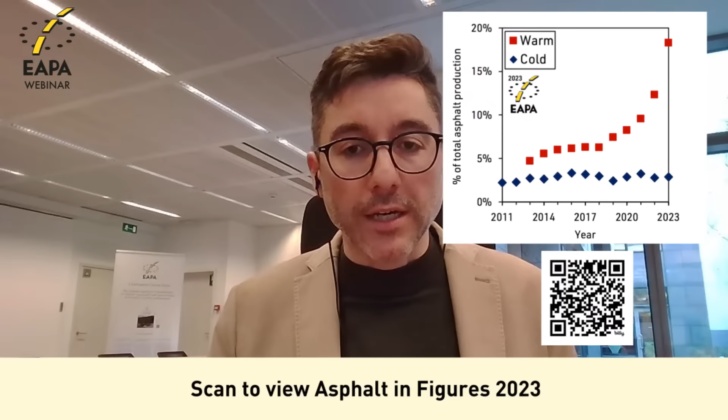Now the question is why. Why is warm mix asphalt so popular nowadays? Well, there are many reasons. The benefits or advantages that warm mix asphalt has were not so relevant in the scenario we had 20 or 25 years ago, but have suddenly become very important with the policies we have nowadays. For example, we have strict fumes exposure regulations in Germany, and the best way to meet the objectives is reducing temperature.

We have stack emissions regulations in the Netherlands, and the same. Reducing temperature is one of the best ways that we can do that. Green public procurement systems in Norway already for many years, where companies have to compete to be greener and greener, and burning less fuel. Reducing temperature is one very good way to do it.

Energy costs and fuel availability. We had some issues a couple of years ago that pushed the use of warm mix asphalt in some countries, for example in France, because it's a way to be more independent of what can happen with the fuels, so we need to burn less fuel. And this we can add to many other reasons, like lower handling temperature, which is safer, short-term aging so more durability, less thermal stress on equipment, and technology that is completely compatible with recycling and reuse of reclaimed asphalt, among others.

So now I repeat the question in the other way. If we have so many advantages, if the technology is not new and there is the will to use it, then the question is, why are we not doing it already? Why is Europe not already producing 100% of asphalt as warm mix asphalt?

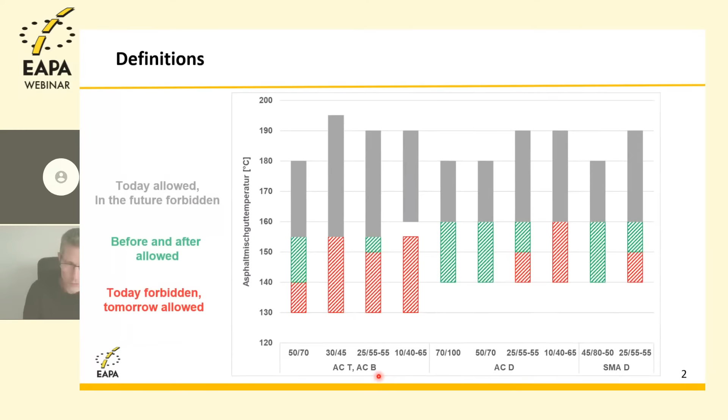First of all, what you see on the bottom is different types of mixtures. ACT and ACB are our base courses, so asphalt concrete as a base course, or asphalt concrete as a binder course—binder courses are our second layer in Germany, starting at the top. The next one, ACD, is the asphalt concrete for wearing courses. SMAD is our stone matrix asphalt, already used on the wearing course. On the line above that, you see the different types of binders: penetration grade binders like 50/70, 30/45, and also polymer modified binders wherever we use them—for example 25/55-55, normally only used for the binder courses, but anyway it is used.

So let's go to the graph. On the y-axis you see the temperatures of the asphalt. I hope you can still see that, but there were different colors in the graph: a gray color, which is the temperature range allowed today, and a green color, also used and allowed today. So gray and green is allowed today. Red is what will be allowed tomorrow, together with the green one. So it looks like—I'm back here—you see the gray ones plus the green one; this is what's allowed today. For example, the first one is 140 to 180.

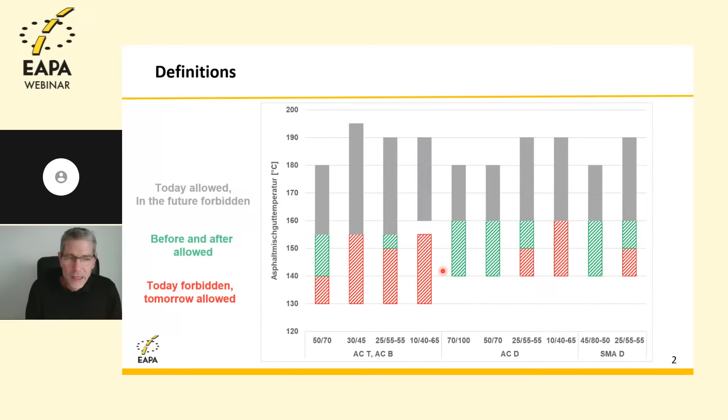Why are we doing that? Some people say, okay, we need that to reduce CO2. In fact, that wasn't the main driver for us. In Germany it was different, we had a special situation.

When we talk about hazardous substances, we have a designation being done by the European Parliament. It's categories which are defined according to the carcinogenity of a special substance, and bitumen was put from category 2 to category 3. In fact, it went better, but that made it necessary to define a maximum working place concentration.

So you were allowed to use it, but only up to a specific limit. In Germany, this process is started by the so-called MAK Commission, which is the Permanent Senate Commission for the Examination of Harmful Substances. They publish in German, in English, in Spanish, so everybody reads that, and they base their publication on scientific studies.

So what did they do? They looked at all the scientific studies and came up with a recommendation. This is only a recommendation, but they came up with a recommendation of 1.5 milligrams per cubic meter in an 8-hour shift. So it's a recommendation, not more, but also not less.

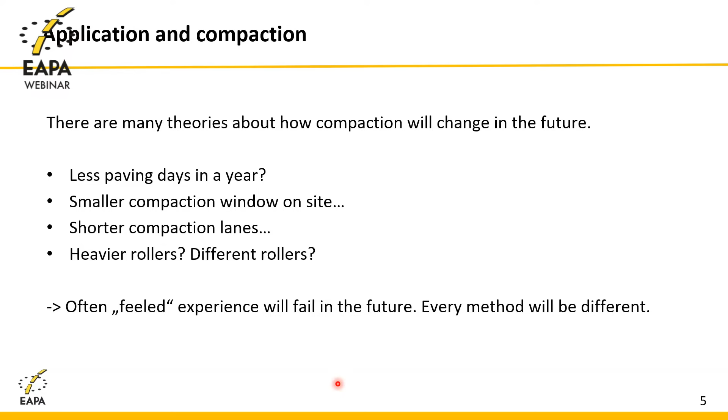So let's go to application and compaction. As I told you, we're still a little bit on the theoretical side. We haven't done too much. We did a lot of test tracks, of course, in Germany, but it's not like we produced 1 million tons of that, not yet. So we discussed that topic a lot, discussing what might change in the future.

The biggest concern for the moment is: will there be fewer paving days in a year? Will we have to stop paving earlier in the year? Nowadays we pave up to December if possible. Will that change in the future? Will we have to take care of the temperatures outside a little bit more than before?

On the other hand, will there be a smaller compaction window on site, which might result in having more rollers outside, maybe also different rollers? Does that make paving more expensive in the end because I need more equipment on site? Also, how should I use my rollers on site? What about shorter compaction lanes? Do I have to be closer to the paver?

Does that impact my safety concerns on site? So a lot of questions we're asking ourselves, and I can't yet give you the whole answer. I'm quite sure that it will also depend on the process we're using. Every process I showed you is different, so every process has to be dealt with in a different way.

We already have experience, for example, with surfactants. Surfactants do not change the rheology of the binder. So whenever the mixture was delivered to the site and it was 30 degrees colder than before, the people working on the paver who worked there for 20, 30 years said, oh, this is too cold. This is what they call dead hot mix. And so they started compacting like hell directly behind the paver, which ruined the evenness in the end.

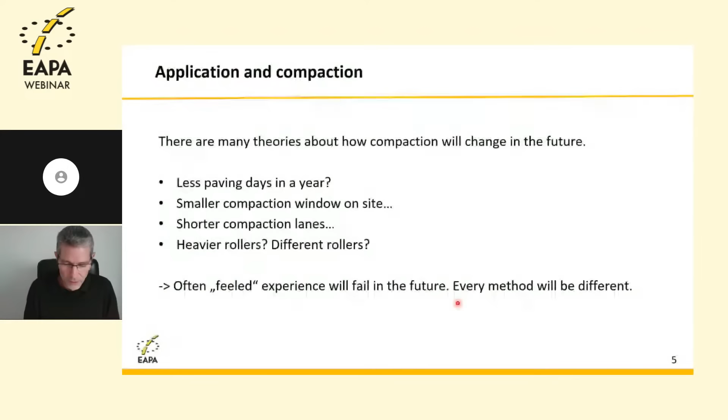Okay, so what else? Workability and compaction. Compactability is a different thing than workability, of course, and I think we will address the topic again in the next presentations. But for compactability, we are still testing with the Marshall device in Germany. So we have a kind of compaction device which is not really able to identify or simulate the effect of some of the methods in the laboratory.

So we actually have a problem simulating how much temperature do we gain, how much of the time window do we still have when we just do that in the laboratory. So we need to have more experience on site. We do not use the PCG, which might give you a deeper insight, and I hope that we will get new testing methods in the future.

This is one thing that really annoys me a lot. We're still using penetration, softening point, Marshall, which are all more than 100 years old. So we will have to definitely change the way of testing and simulating it.

Same for workability. For the moment, there's nothing, not even an old method for workability. So we are thinking about maybe using that NIAS device for looking at workability, trying to help the people who work by hand with the asphalt in the future. So this is still something we will have to figure out.

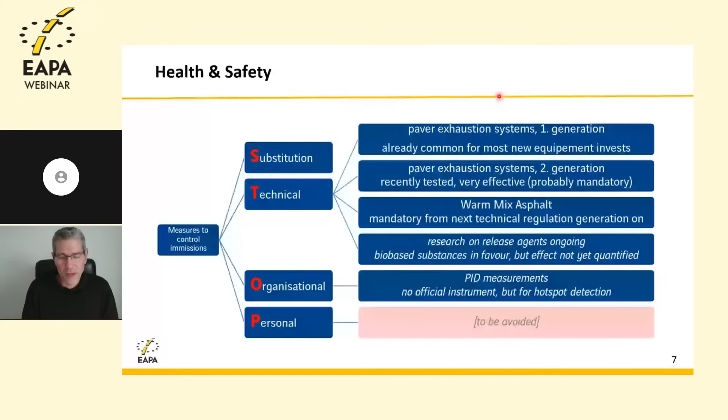Okay, just one look at health and safety. So health and safety actually is the driver in Germany, and you might have heard about this STOP mechanism. So we have to start with substitution whenever we have a problem. For the moment, we don't see one. Then we have the technical things, and this is what I wanted to show you.

So we're not only doing Warm Mix. Warm Mix is one of the technical things we're doing, but one of the other main issues for us is the paver exhaust systems, or ventilation systems, as they're sometimes called. We already have a second generation on the market thanks to the equipment producers. Only the combination of these two can help us reach this 1.5 milligrams per cubic meter. So it's not only Warm Mix Asphalt, we will also have to deal with equipment in the end.

I told you that we will have to implement Warm Mix in our regulations. That was one thing we promised the AGS. So we said, okay, we will definitely put that in our regulations. We have actually proceeded very far with our new regulations for production and for paving, and we're sure that we will get them out in the first quarter of next year. So from that day on, our regulations will be 100% Warm Mix. I'm still a little bit nervous about that big step, but I'm sure we'll get it done.

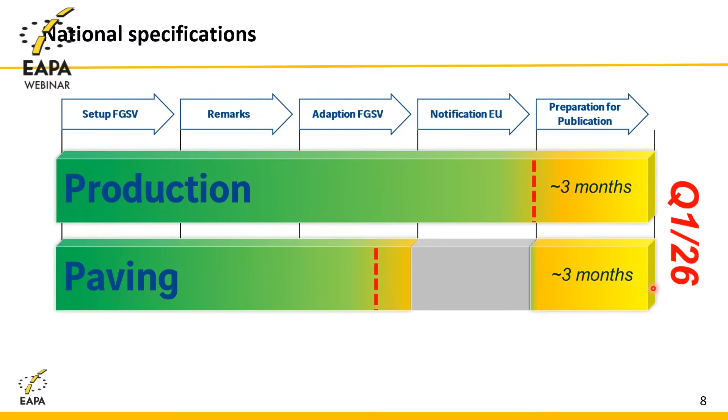So we have to have on site in the layer 98% of the compaction we got in the laboratory. I told you that with Marshall compaction, we're having trouble getting the same effect which we get outside. So some of the methods we use for Warm Mix will not be so dominant in the laboratory, so we might not see that effect there. At the same moment, we will get a problem outside when testing after we've paved, so there will probably be a lot of discussions. At least we will now have the void content, not only for the top layer but also for the other layers in Germany. That might help in the discussion, so that when we have trouble with the compaction degree, we can get back to the void content, because the void content really tells you the truth of what has happened.

Okay, so just some lessons learned in the end. Most people in the German asphalt industry are not only skeptical, they are really masters in ignoring something. So we went out and made roadshows with the German Asphalt Association. We addressed more than 900 people about the topic. We told them this will come, please prepare for it. I just did a seminar two weeks ago, and still people are asking me, are you sure this will come? And yes, it will come.

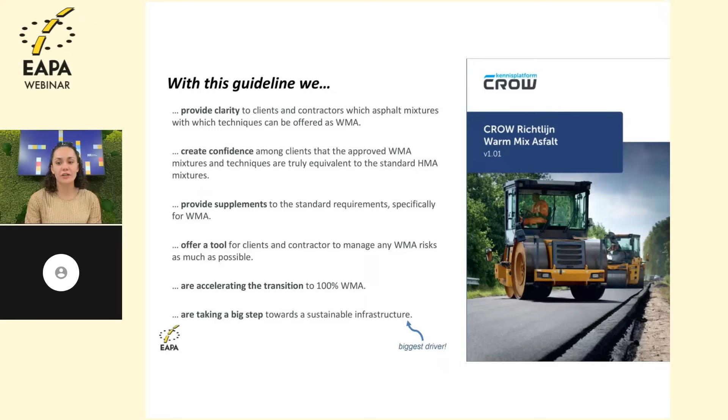And with the guideline, we provide supplements to the standard requirements specifically for Warm Mix Asphalt, whereby we offer it as a tool for clients and contractors to manage any Warm Mix Asphalt risks as much as possible, in the hope we can accelerate the transition to 100% Warm Mix Asphalt. Taking this step toward a sustainable infrastructure was the biggest driver to want to make this all a success.

So this guideline ended up as a physical bookwork with 3 chapters and several annexes. It explains in general what Warm Mix Asphalt is and frames the outline in which the document operates. But it also delves deeper into the technical aspects and provides recommendations for its application. Then we have some annexes that go deeper into various aspects of the general chapters, and 4 annexes that each address one specific technique in more detail.

And the best part, next to being a physical document, it is free to download online. The link is below, but it is in Dutch and non-searchable. But if you want to read it, it's free.

In the context of communication, it's important that we all share the same understanding. Therefore, the guideline also contains a list of definitions, in which the following definition is used for Warm Mix Asphalt: asphalt that is produced at a temperature between 100 and 140 degrees Celsius, with the note that that's the temperature at which the mixture leaves the tank. So it can be that some of the raw materials are preheated above or below this 140 degrees Celsius.

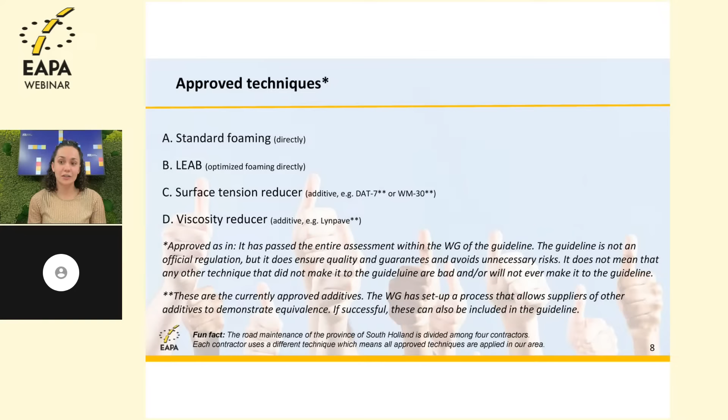To give you an idea of the spread of the different techniques, in our province road maintenance is divided among four contractors, and each could choose their preferred technique. Every contractor actually chose a different technique, so all four approved techniques are being applied in our area. I don't think that's a coincidence, but it says something about the popularity of the different techniques.

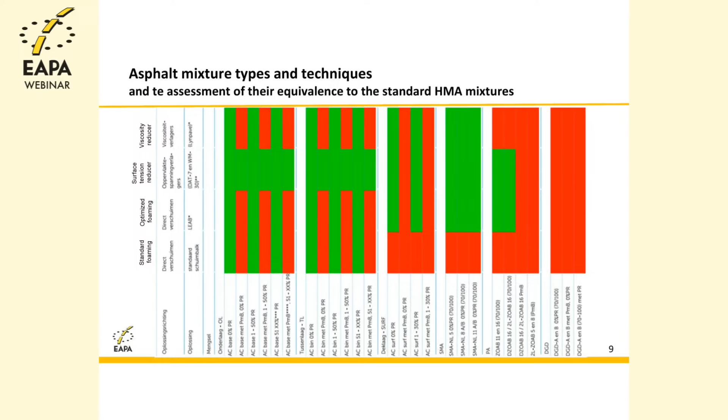During the assessment, we not only assessed the techniques in general, but also specifically per type of asphalt. We adopted our standard asphalt mixtures, which is asphalt concrete for surface, base, and bind layers, stone mastic asphalt, porous asphalt, and noise-reducing asphalt. Again, we assessed based on fundamental theoretical tests, functional research data, empirical evidence, and practical assessments, resulting in a matrix where green means it was found equivalent to hot mix asphalt, and if not, the box is red. With all this, we wanted to create confidence among clients that we are not taking this transition lightly, but that it consists of well-considered choices based on quite heavy assessments.

But as if that was not enough, we, the clients, wanted even more certainty - not this time about the quality of warm mix asphalt in general, but whether every asphalt plant could produce it and every contractor could apply it. So to increase client confidence, a separate program was set up in which every asphalt producer can demonstrate their ability to deliver high-quality warm mix asphalt, and the contractor can demonstrate their ability to apply it, whereby every test section is subject to independent and expert supervision, and all results are made public.

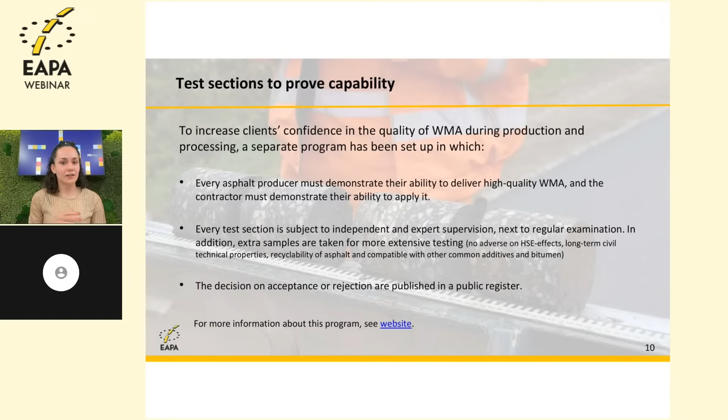Also, extra samples will be taken for extensive testing, for example to check that it has no adverse health, safety, and environmental effects, long-term empirical and functional properties, and the recyclability of the asphalt mixture, but also that it is compatible with other common additives and bitumen in case these come into contact during the application of reclaimed asphalt. If you want to read more about this program, you can click the link below - in this case it's a website, so I think it can be translated to English or any other language.

Like I mentioned before, we also examined the potential risks associated with warm mix asphalt. We quickly concluded that many of the risks are not exclusive to warm mix asphalt, but also applicable to hot mix asphalt. However, existing risks may occur more rapidly and intensify in the case of warm mix asphalt due to accumulation of multiple risk factors. Therefore, the guideline includes a comprehensive list of identified risks accompanied by corresponding measures designed to minimize and control the likelihood of their occurrence as much as possible.

This list of control measures is based on best practices at various phases, from design and planning up to processing the warm mix asphalt. This not only helps mitigate risks, but also takes away certain fears, mostly among clients, about warm mix asphalt. Some best practices per phase: in design and planning, you can minimize obstacles and manual work. It's good to take the season and weather into account when planning, and also bring contracts to the market in a timely manner, and therefore prepare them in a timely manner.

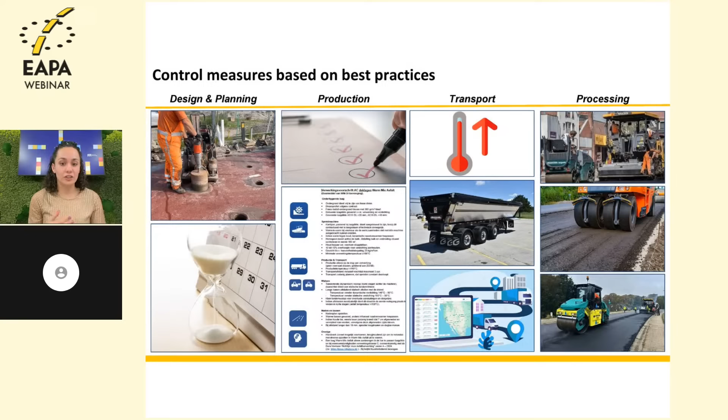But most important, I think, are the rollers. They need to be heavy enough to compact the right way, or you can maybe even think about adding an extra roller. Also, the rollers should be closer to the spreading machine, whereby they have to prioritize compaction of seams and joints.

And when hearing all this, you might think, sounds good, they'll manage just fine. Well, we hoped the same ourselves last year. We have a national agreement for the standardization of warm mix asphalt, supported by a widely endorsed guideline, which I just talked about. And again, there is a lot of experience among producers, contractors, and clients with warm mix asphalt. Why is it not yet 100%?

If you ask me, warm mix asphalt is not merely a technical change. It also requires adjustments on administrative, cultural, and economical levels. For example, some technical barriers are that not all asphalt plants are yet fully equipped for production on lower temperatures at this moment. But also the variability of mixtures is causing trouble.

The Dutch market has an absurd wide range of asphalt mixtures, whereby none of them behaves identically when produced as warm mix asphalt, which increases the need for type testing and validation.

If you look at the administrative and organizational barriers, many existing specifications and contracts still prescribe or refer to hot mix asphalt. Amending these requires procurement and adaptation, while no single national enforcement ensures that hot mix asphalt is banned at this moment, which means adoption of warm mix asphalt relies on a voluntary basis. With that, most local authorities are waiting for national obligation or sector-wide conviction before changing their policy.

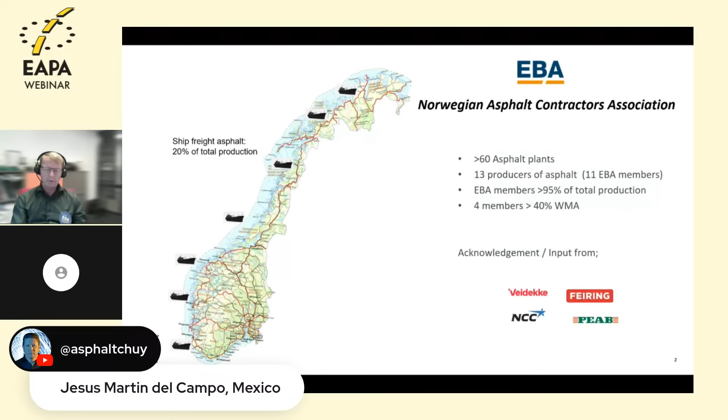I have to thank the other companies, members, Feiring and NCC and PEAB for input to this lesson learned, and this might be a little bit more, or just experience we have had now for the last 14 years on different plants, different mixes. It's not that problematic with Warm Mix, but we all have on each plant some various problem, or one problem that occurs on 3 plants or whatever. So first, the definitions.

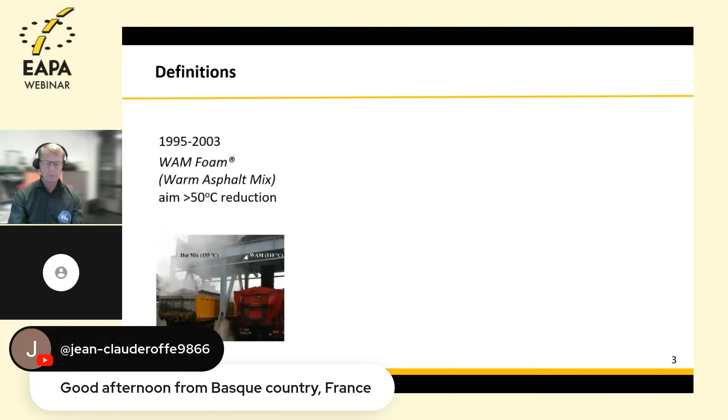We started in 1995 with this famous picture where the aim was to reduce the temperature by more than 50 degrees. We call it warm asphalt mix, WAM Foam, which was the first product, and we had 2 plants in Norway in 1995 producing this.

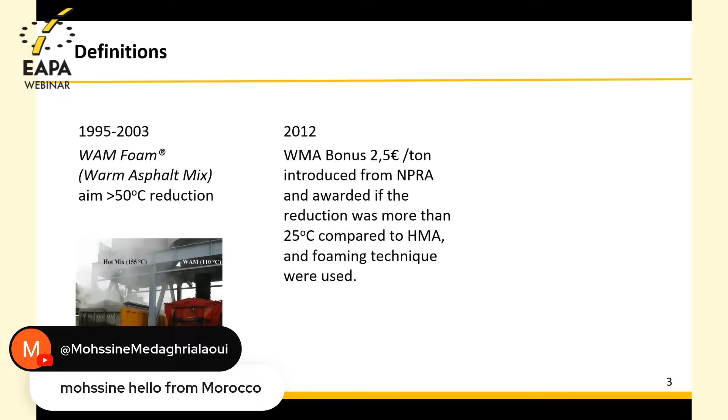Since 2012, EBA and the Road Administration and the government would like to push Warm Mix production. In this cooperation we had with the Road Administration, there was a situation with a bonus if we produced Warm Mix Asphalt in contracts. The requirement was that it had to be more than 25 degrees reduction, and based on some tests we did the year before, we had to use the foaming technique. So that was the first years, and then since 2019 we have used the EAPA definition that we have to reduce the temperature by more than 20 degrees.

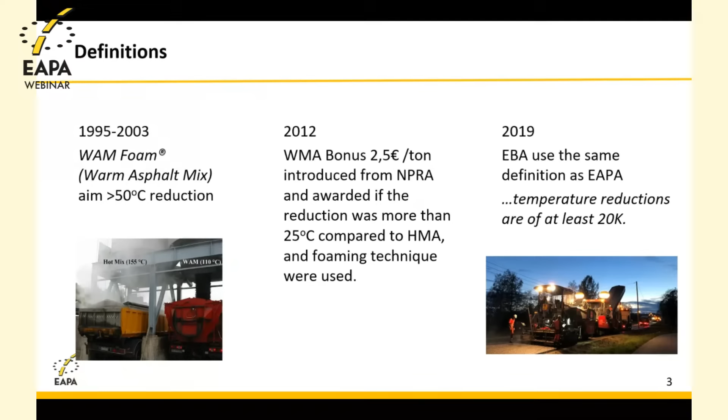Then we had also the discussion with the Labor Inspection Authority in Norway that they also want to push this, and they require that EBA report the percentage of Warm Mix Asphalt each year, and it had to increase. The aim we had back then was to reach 40% Warm Mix Asphalt just after 2020. Something happened in 21 with the pandemic and everything, and now it started increasing again.

And as mentioned, about 1 million tons was last year's volume of ship transport with warm mix asphalt or hot mix.

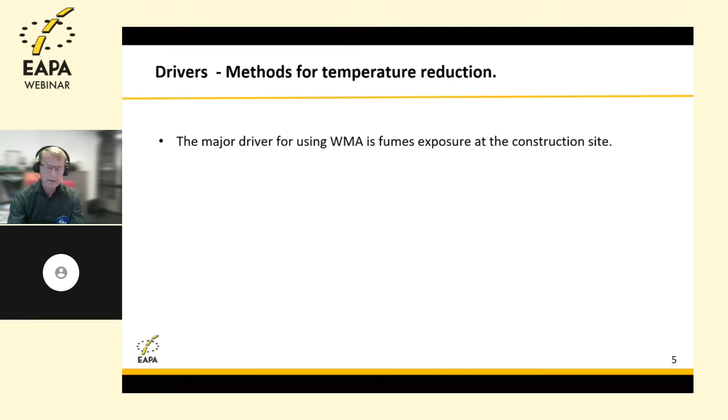Drivers, as you asked for, Breixo, it's mainly the fume exposure, and in EAPA on several committee meetings we have had this discussion about how to measure the fumes, which system or which requirement to use, and whether they are similar. But anyway, we have done a lot of tests in Norway with the Occupational Health Agency.

That started in 2011 when we tried. We had 11 different test tracks with foaming techniques and 5 different additives. Based on this test, a foaming system was introduced that would give us the bonus we have.

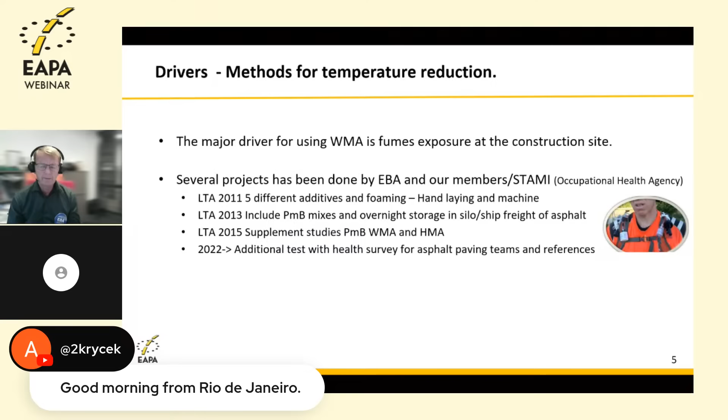Then we have had several tests on paving sites, both with ship freight, with PMB, with different types of PMB, inside tunnels, and in 2022 we also did a huge test for the health of the workers before season started and mid-season in July.

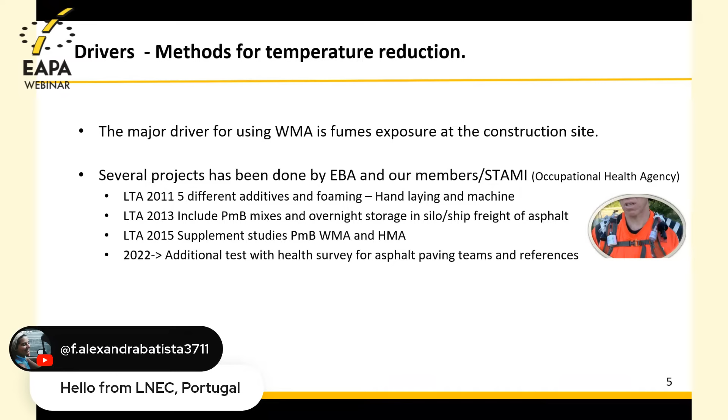Those results will be finalized, I think, early next year, we hope. It's a PhD study going on with all the results, so hopefully there will be some. So what we have done since the bonus system was introduced in 2012, nearly all the plants have a foaming system. That's the experience.

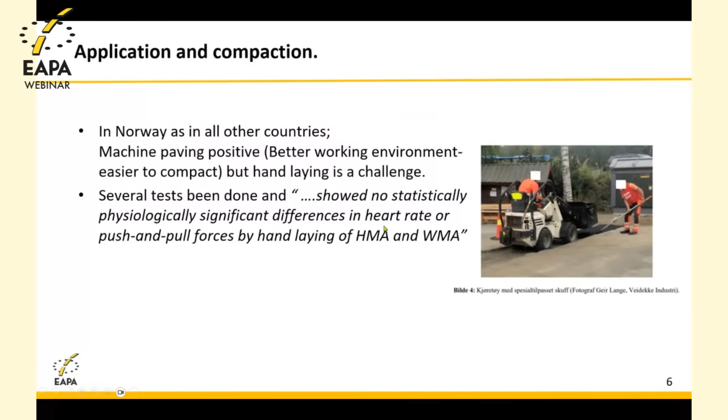As Tessa and Knut said, Warm Mix Asphalt works, but there's always a complaint when you have a handling issue. Some of these tests we have done show there is no significant difference between warm mix and hot mix asphalt, but that can change the attitude for a lot of people. So smaller contractors that just buy asphalt from a plant, they order really hot or sparkling asphalt, as I've heard from the UK.

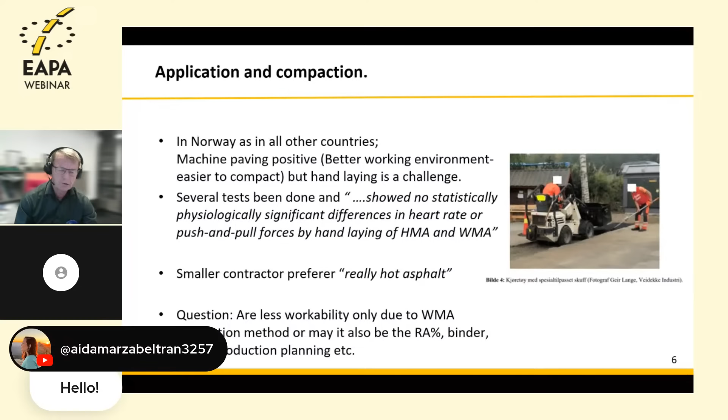And in all this discussion, it's always an argument why it doesn't work, but it can be a lot of things. So it's not one thing in each plant or maybe each country or whatever. It's the same with hot mix asphalt - you may have difficulties or some failure with something, and it's maybe not the hot mix asphalt itself, it's the production or all the other things in the paving line.

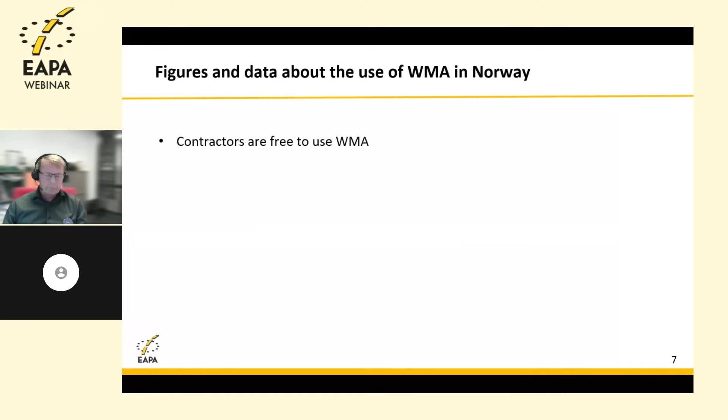Contractors in Norway are free to use warm mix asphalt. There's no limitation or anything in the guidelines. Some counties in the northern part have required 60 or 70% warm mix asphalt in their paving contracts in earlier years to increase the volume, and that's good.

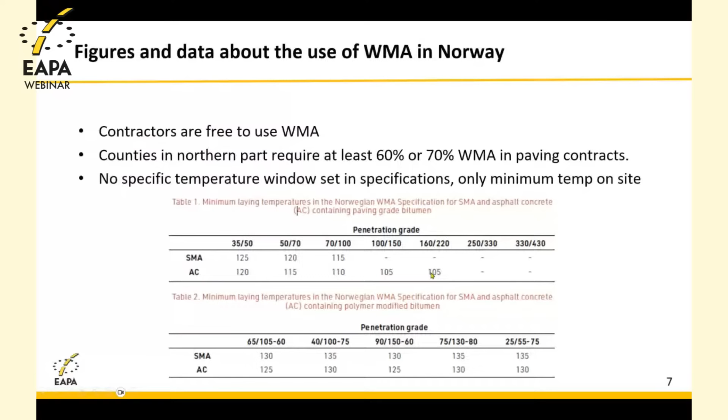Just one example to discuss the paving window and everything. What we see when we use infrared cameras behind the paver is it's easier to have a homogeneous temperature on the mix at the site with warm mix asphalt, and yes, you have a larger compaction window to achieve the right air void.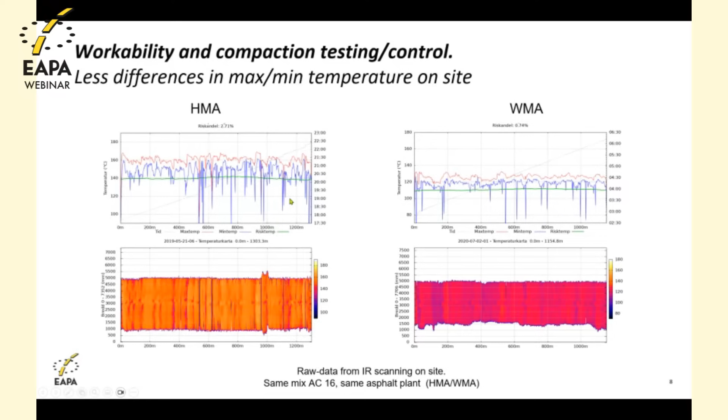All this up and down here is either a roller or a person going into the infrared scanning. This is from the same plant, same mix, but warm and hot mix asphalt.

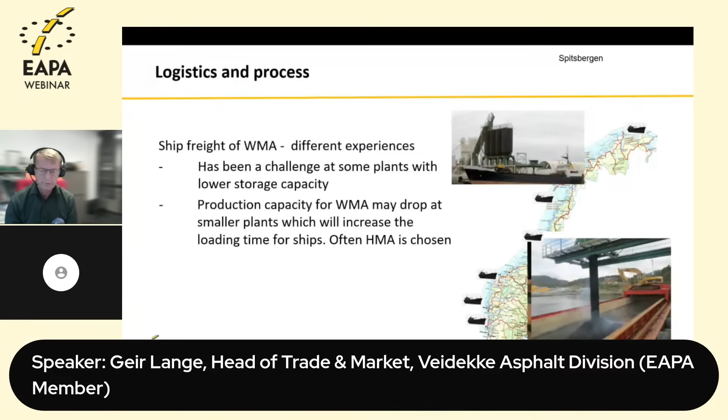Logistics, that's another thing. As I mentioned, all this ship freight with asphalt has had some problems at some asphalt plants. It depends on the storage capacity at the plant - if it takes a long time to load a ship with 1,000 tons or 1,300 tons or 800 tons, then something will happen to the mix. So that's not preferable. If you have the right silo capacity and loading system, then it works quite well.

And on smaller plants where you don't have a lot of loading systems, they often choose hot mix instead of warm mix. So that's one of the drawbacks with ship freight.

We also tried some years ago, in 2017 or 18, sending ships to Spitsbergen, a 48-hour sailing with warm mix asphalt, and it worked quite well when we paved it. The paving team really liked the warm mix asphalt when we sent it that distance. So I don't think you have to do that in the rest of Europe, but anyway.

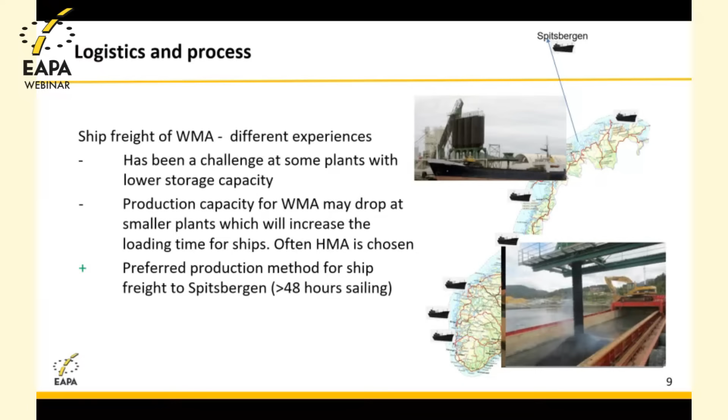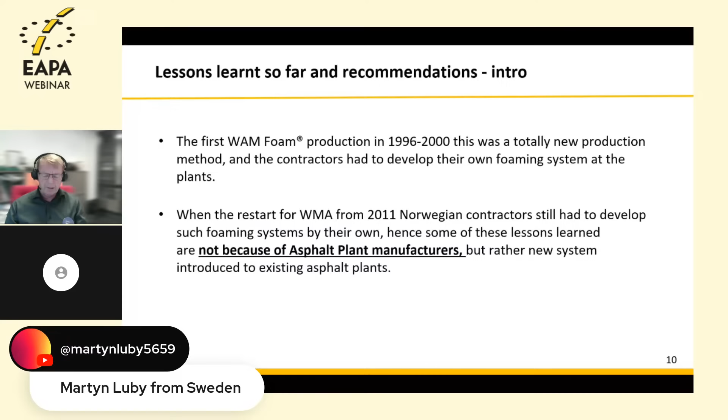And lesson learned, that's just a disclaimer. As I mentioned, we have a lot of foaming systems, and we had to construct our own foaming system in the plant when we started in 2011, 12, 13. So when I collected this experience or lesson learned, it's not due to the asphalt plant manufacturer. Bear with me, we produced or built this system on our own and introduced it to an existing plant.

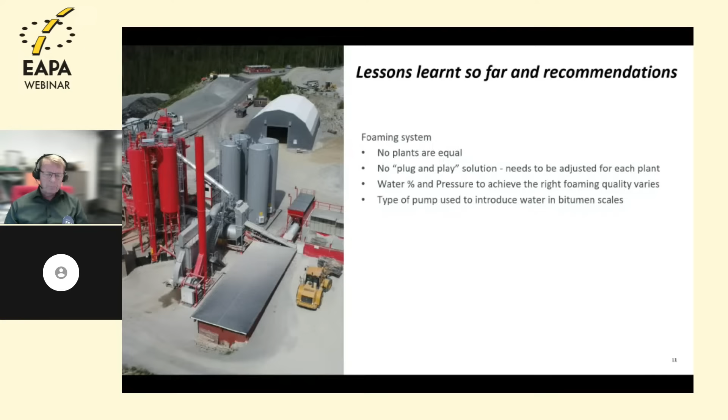So it's not a plant manufacturer thing, but experience we have achieved around Norway. With the foaming system, the major rule is that no plant is equal. There's no plug and play to get warm mix asphalt out. You need to adjust the plant, adjust the water percentage to get the right foaming, adjust the pressure, and you need certain types of pumps, as some other types don't work.

It's like you have to learn how your plant works with your mix, your reclaimed asphalt percentage, and everything else. When using the foaming system with water, you also need to check the quality of the foam. The left picture is a foaming sample that doesn't expand, it just bubbles in the bottom of the barrel, while this other one works quite well, showing expansion of the bitumen and foaming in the mixer.

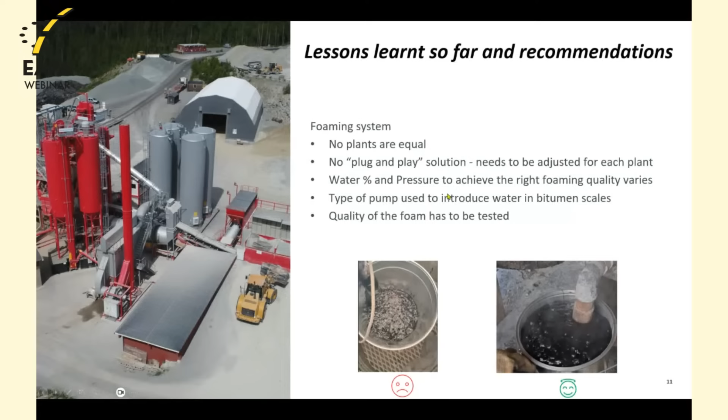So if you struggle with warm mix asphalt production with foaming, maybe the reason is because the foaming system doesn't work sufficiently, or the water percentage is too low, or whatever. You have to address each plant separately.

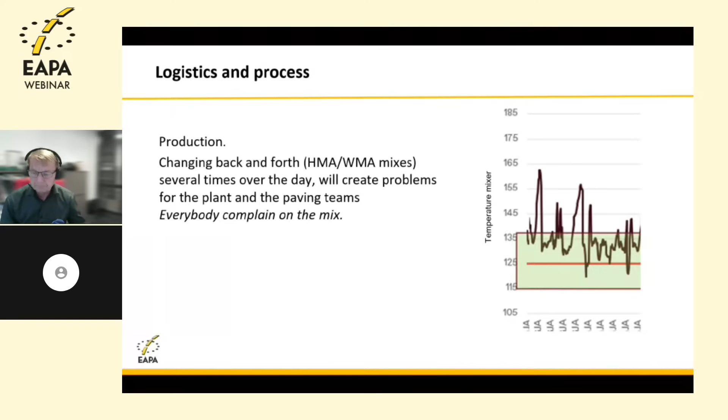The other thing that may cause problems is when you produce warm mix asphalt and the next customer wants hot mix asphalt in the plant, you get a very up and down temperature in the mix. This is an old picture of temperature at the mixer, but here I just took out the warm mix asphalt production during a day, and you see an increase in temperature due to a hot mix asphalt batch just prior to the warm mix asphalt recipe.

So why not 100% warm mix? Because then you have a more stable temperature in the plant. The other result is that everybody complains on the mix, both the hot mix and warm mix, when you have these changes. That's not rocket science, but it's a thing to remember.

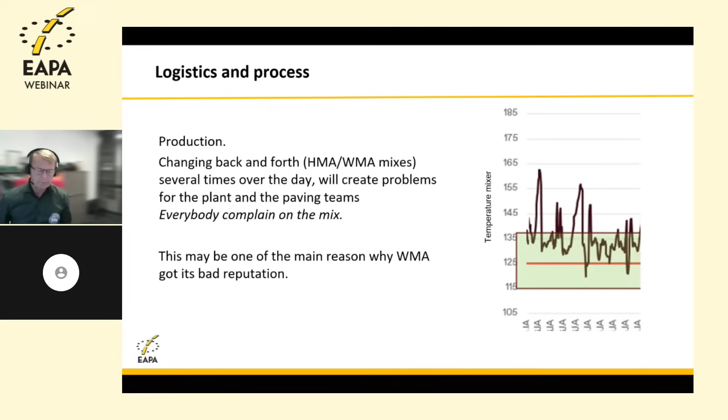So I think this is maybe one of the main reasons why we got a bad reputation for warm mix asphalt, and why some people really don't want to produce it.

On the other side, that was just the foaming system, but various binders may have different foaming properties. Sometimes it doesn't work, sometimes it works. You have to adjust the temperature in the filter when you produce with the foaming system.

Mixing time is another issue. Some of the plants and companies I've talked to have some problems with the mixing time, they have to increase it, which lowers the production capacity of the plant, and then you start a discussion of how much you have to produce.

The other thing we've seen, that all of the companies have seen somewhere, is that you may get evaporation or foaming that creates some clogging in the silo or in the tower of the plant. It can be adjusted, but it's an initial problem you have before you've adjusted your plant. Also within the mixer itself, there can be some clogging, not every day, but over time.

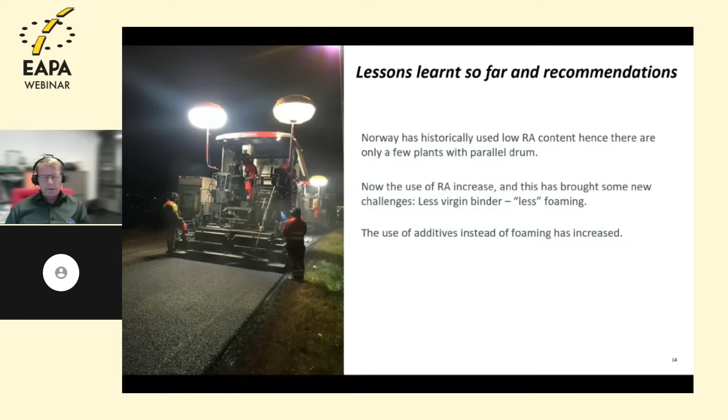The other thing is, you saw the increase in warm mix asphalt with a small drop 2-3 years ago. That's also maybe due to the percentage of reclaimed asphalt we use in Norway, which hasn't been at the level of Germany, Holland, or the UK for many years, but now it starts to increase. When we have less virgin binder to foam, the foaming itself will be different, which leads to some problems in some plants.

Some of the comments I received were that instead of foaming, when you have a high amount of reclaimed asphalt, we use additives instead of foaming to lower the temperature.

The other thing, why not? It's attitude, culture, as both Tessa and Knut said. And also the know-how at each plant. That's quite important. You can't just plug and play and start producing it.

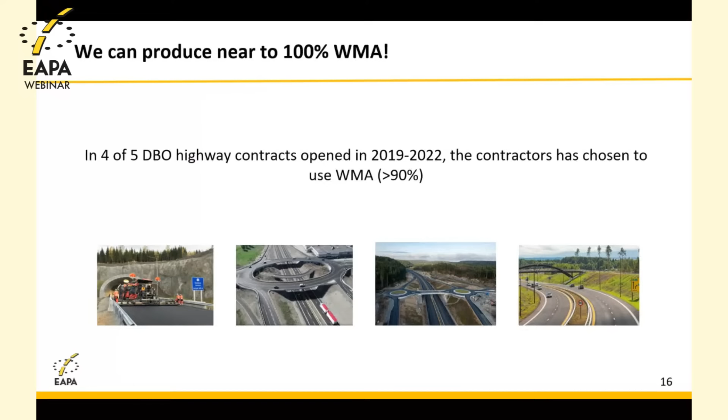I think one of the best examples is that yes, we can produce warm mix asphalt at least 90% or 100%, but this is for 4 of 5 design-build-operate contracts opened in Norway over the past 5 years, where the contractor has responsibility for the mix, and they have chosen to use warm mix asphalt. This involves 2 different asphalt producers, not just one, and it still works quite well.

So shouldn't be any problem, I think. So that's about it, Breixo. Hope the sound was okay, and some input.

These technical inputs - in fact, I think it's very important what you mentioned, the know-how. I remember from conversations with Gary in our committees that sometimes an asphalt manager says with the local materials we have it's impossible, it cannot happen. Then another manager comes from a different plant, spends some time there, and at some point it works.

So it's a lot about the know-how, as you said - we can't just come, plug it in, and start producing. It requires some adaptation. We have some questions about adaptation too, which you mentioned, and we will come back to this point later.

Sure, please keep asking questions and comments. There's an excellent debate right now in the chat with a lot of questions, and I think we'll have to spend a few minutes of the webinar dealing with all these questions. This is great news - please continue like that for all the audience. Thank you, Ger, and see you in a few minutes.

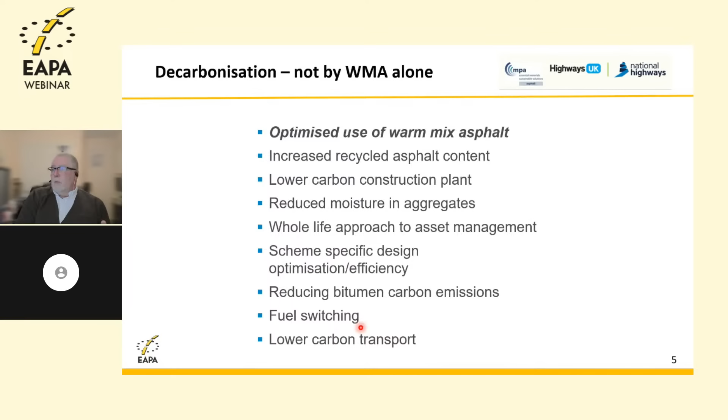Important to note that while decarbonisation is a driver, we will not achieve decarbonisation or net zero by warm mix alone. Again, from another presentation, this was the list we agreed with National Highways of levers to get to decarbonisation, net zero. Optimised use of warm mix was right at the very top, so if we ever needed a driver, there's an example of it. Other items included recycled materials, lower carbon plant, reducing the moisture in aggregates so you don't have to put in as much energy to get the water out, asset management, how we look after the roads once we build them, and other specific optimizations on sites.

Nobody has actually mentioned so far reducing bitumen carbon emissions. The majority of carbon in asphalt comes from the bitumen and from our drying activities, so we need to look at those things in combination. Reducing temperature is just the start of all of that.

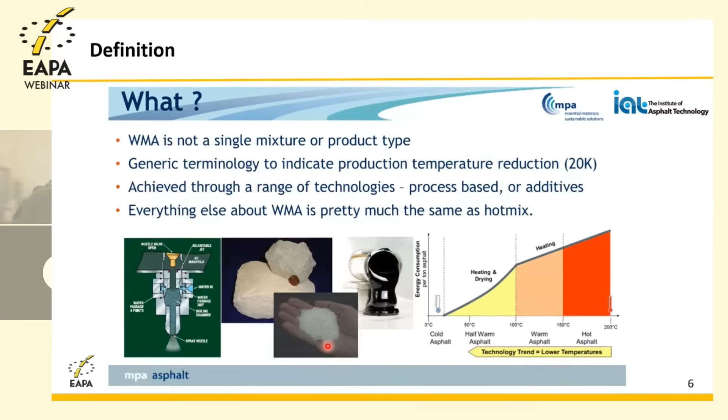So we were asked to provide a definition for warm mix. Again, from another presentation, what is it? I think it's clear from what we've seen already that a lot of people, when they heard the terminology, thought it was a single thing, a single mixture or product type. It's not, it's a range. It's generic terminology to indicate a production temperature reduction for whatever asphalt type you're making. It's achieved by a lower temperature methodology.

That can be process methodologies like foaming, or additives. In the pictures we have our zeolites, our chemical additives, and all of these can be embedded in the bitumen phase as well. So it's not a single thing, it's a range, but otherwise everything else about warm mix is pretty much the same. It is only the temperature that's the defining difference.

So how do we achieve temperature reduction? There's a snapshot from our video. Stress again, achieved with a range of foaming and additive technologies, and you get reductions of up to 40 degrees lower than hot mix. As with Norway, we follow the EAPA definition of a 20 Kelvin, 20°C reduction as part of the definition.

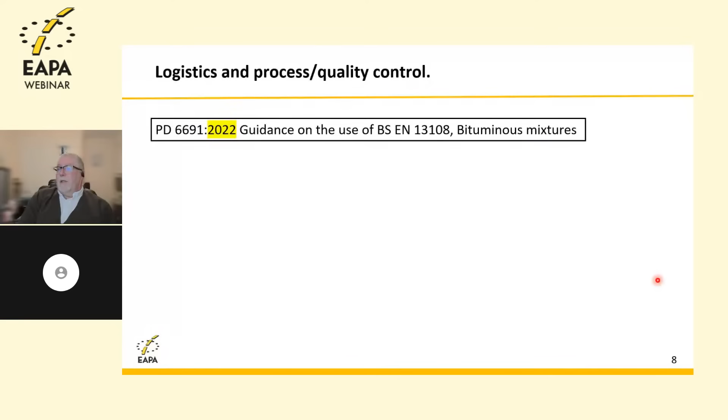How do we control it? Well, within the UK, we have what we call national application documents or published documents issued by British Standards Institute. The latest one of those, in terms of production of mixtures as a guidance document, was revised and published in 2022. This is a direct copy from that document.

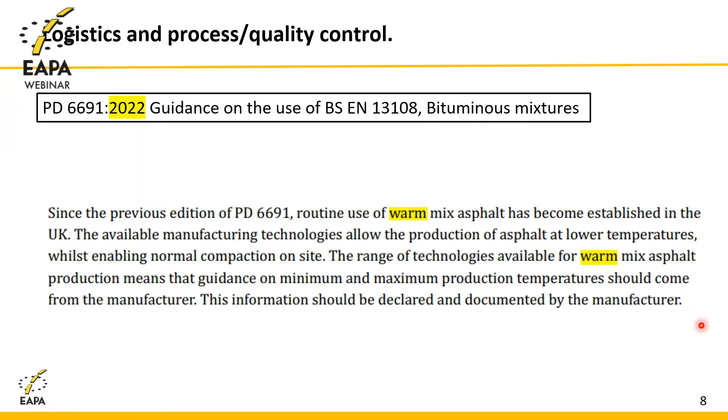Since the previous edition, routine use of warm mix asphalt has become established in the UK. The available manufacturing technologies allow the production of asphalt at lower temperatures whilst enabling normal compaction on site. The range of technologies available for warm mix asphalt production means that guidance on minimum and maximum temperatures should come from the manufacturer and should be declared and documented by them. That ties in with your obligations on CE marking, UK CA marking, but the onus on declaring temperature lies with the producer.

And all that feeds into your Part 21 factory production control systems as well.

How do we control workability and compaction? How do we test for them? I suspect this will be a topic for discussion later.

Again, from BSI, we have an application standard, BS 594987, revised and published at the end of 2024. This sets out the requirements, the specification for transport, lay, and compaction, and also how we address type testing. Within that standard - I know that's probably very small for everyone to see.

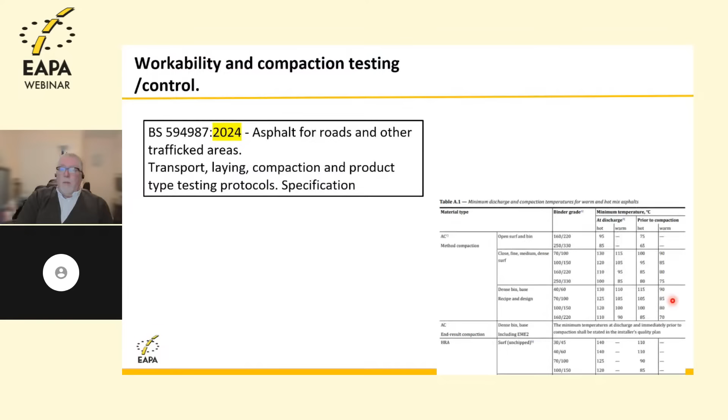In the 2024 revision, we decided to include warm mix asphalt temperatures. So down the left here you have a range of product types, binder grades, and the comparative hot and warm discharge and compaction temperatures. That's how we set it out, for average run-of-the-mill products, non-performance based product types. We specify the temperature.

Lots of things we don't include - hot rolled asphalt, we haven't quite mastered warm mix hot rolled asphalt. The clue's probably in the name there, but they're really workable mixtures, so compaction isn't the same issue. In general, we're looking at that 20-degree reduction compared to hot mix.

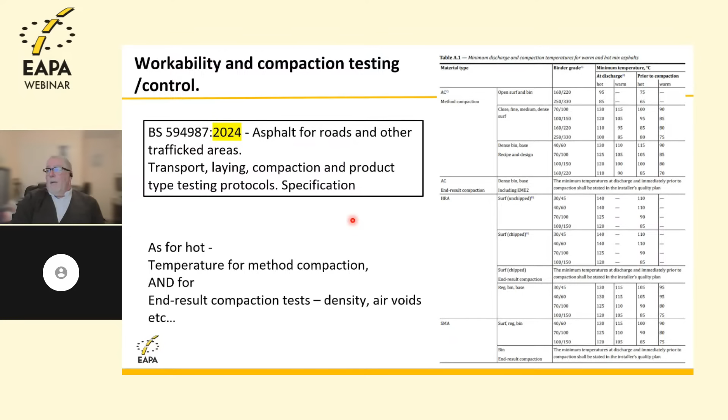As I said, for method compaction everything's the same, and in terms of end-result compaction products, we also have to comply with the density, air voids, and everything else we would test in situ. So we're aligning on what we need to assess, and for a number of materials we provide guidance on what that temperature needs to be.

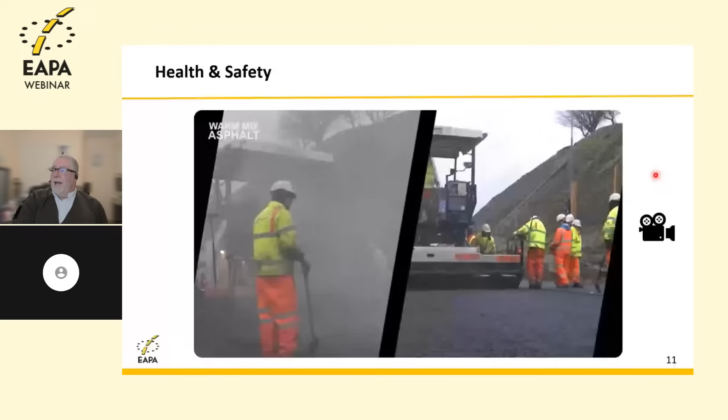Health and safety, another comparator similar to what Gare showed. These two pictures were taken on the same day, on the same site, with the same equipment. You can guess the one on the left is hot mix, and the one on the right is warm mix. If ever you needed a visualization of fume reduction through warm mix, I think that's it. We haven't been over-regulated on health and safety thus far, but it's something we continually keep an eye on. But it is a benefit that we recognise that comes from warm mix.

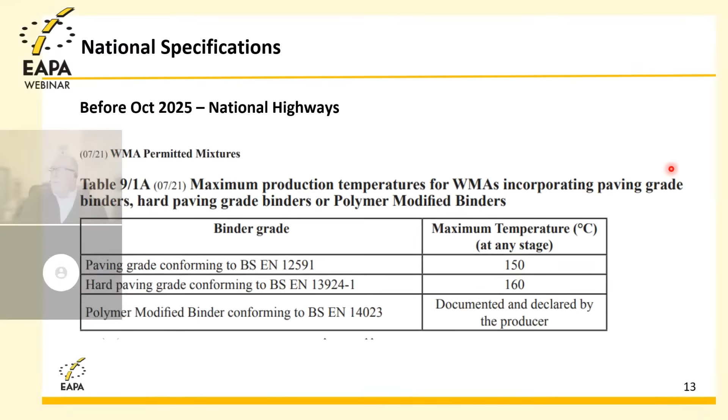And what did that mean in terms of national specification? Before last month, our specification looked like that in relation to warm mix. There was a list of permitted mixtures, and only those mixtures could be produced on a contractual basis using warm mix. So we got 7 product types there, and the compliance requirement on temperature was then defined against the paving grade as used in each of those product types. So you had 7 product types and the variables on paving grade.

So straight run, penetration grade binders, maximum temperature 150; hard paving grade binder 160; and interestingly on polymer modified, that was still permissible to use with a producer's declaration as long as it showed a temperature reduction.

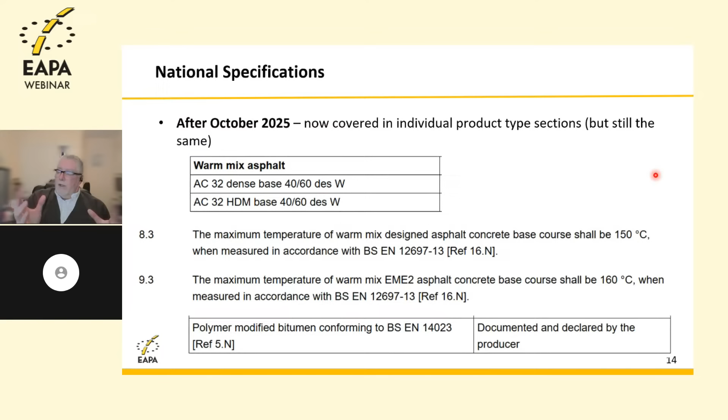And again, for that same material, maximum production temperature 150 degrees C. Then for an EME2 asphalt concrete base course, that's the hard paving grade 160, still the same. And polymer modified, I think this came from our SMA specification, again still documented, declared by the producer. So the requirements haven't changed, but the way we need to read the specifications has. That's a problem for us.

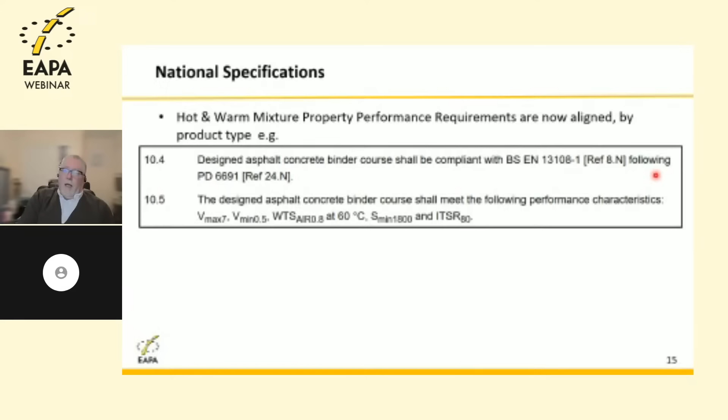And the majority of hot and warm mix property performance requirements are now aligned, again by product type. What did happen in the early days of warm mix is that the specification requirements were more rigid, more potentially difficult to achieve than their hot mix equivalents. But with the experience and trials carried out, and with the belief and approach to defaulting to warm mix, actually the performance requirements for hot mix were amended to match those for warm mix where they were more challenging. So again, just a range of characteristics there: voidage content, wheel tracking, stiffness, and retained stiffness. That was an interesting maneuver, and I think it's a positive one.

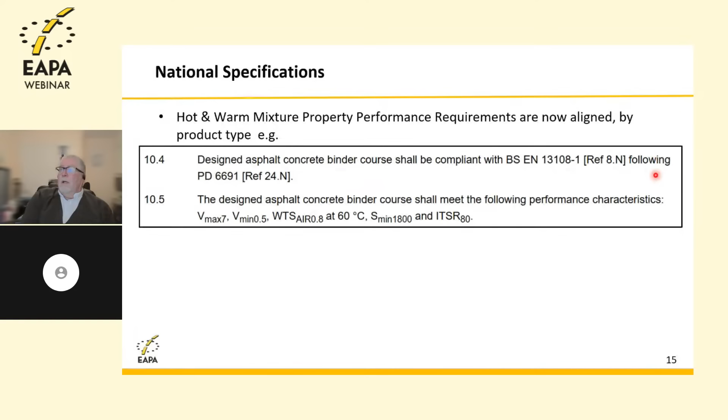The guidance note provided to justify all that is that the inclusion of both warm and hot mix options enables optimization of material selection compliant with the designs to suit site-specific constraints. That allows the specifier, where they believe warm mix may struggle, to still specify hot mix where they absolutely feel they need it. That's the only way to meet the requirements for a specific site.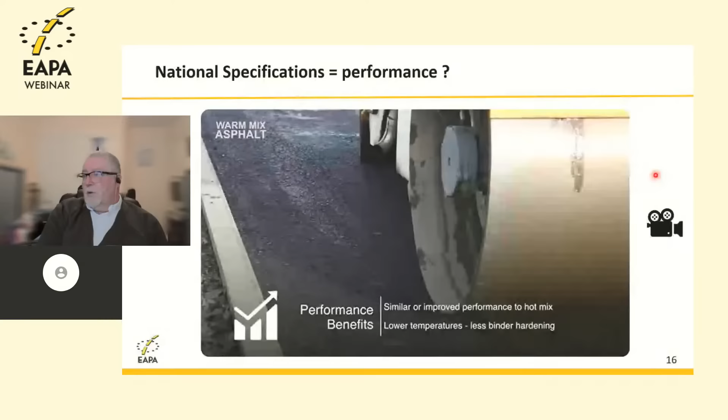So what does that mean in terms of performance? Again, from our video, all the research we've seen, we've read everything from across Europe, we've done trials in the UK, everything is telling us we get similar or actually improved performance to hot mix. I think there was a question in the chat about long-term performance - one perception still to be proven is that lower mixing temperatures reduce initial binder hardening, which should be beneficial for durability.

What other performance benefits have we seen, or do we think we're going to see? We heard earlier about shorter cooling times, so theoretically we can get shorter work programs. We need less traffic management on the road, we can reduce costs of having traffic management out there and traffic delay. There's less disruption for road users, and the carriageway actually gets reopened faster for the same volume of material that goes in.

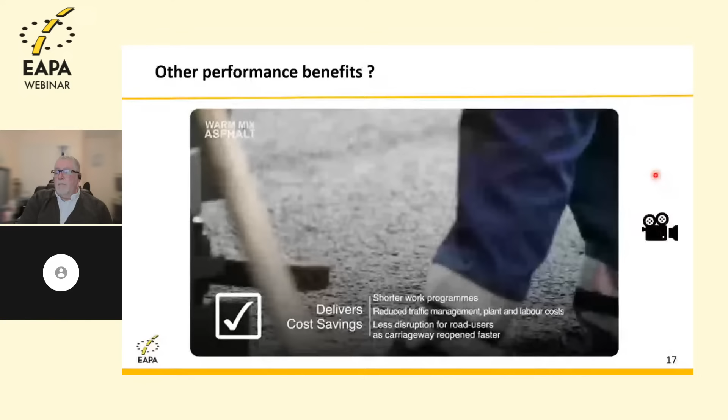Right, so that's the approach we've taken. What does that mean in terms of our production? I haven't got numbers as far back as Ger has, but in 2021, GB production of warm mix was estimated just over 1 million tonnes of 26 million tonnes total.

So that was just 4.5% of total volumes in Great Britain. By the end of 2023, from a little survey I did amongst members, our members produced 6.5 million tonnes of warm mix from a total of 21.5 million tonnes, which is 30%. So in 2 years, we leapt from below 5 to around 30%.

We'll give ourselves a round of applause there, but there is a caveat that that ranges from 3% up to 70% by the producer, depending on their warm mix production capacity. With over 250 plants in the UK, they can't all be changed overnight - they can't all have new systems and new suppliers embedded - but definitely the major companies are defaulting to warm mix across their product ranges.

We'd like to think that was part of, or a result of, the major promotional push by industry - myself and members going out doing presentations. As the association, we provided briefing notes and promo materials. This is from 2016, where we were talking about tomorrow's asphalt being here today. So nearly 10 years ago, warm mix was really still ready to go, and it's taken a long time to break the back of the market.

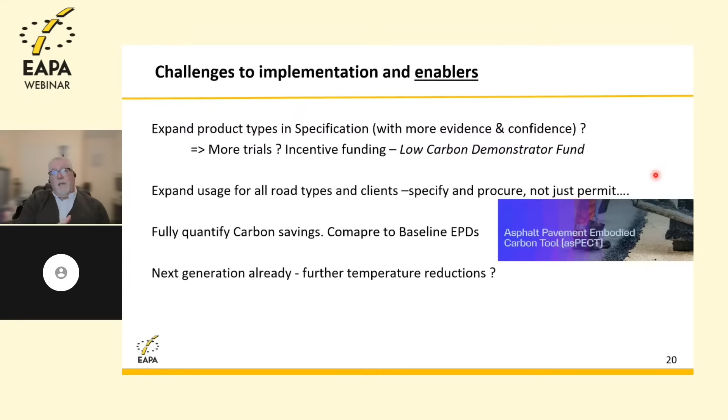Already we can see the next generation of Warm Mix and cold mix. Can we reduce those temperatures further? Is Warm Mix a passing phase, and should we actually be concentrating on cold mix? And are the standards actually a blocker to that innovation?

So what lessons have we learned and what recommendations? Again, borrowed from other presentations. As I said, standards are not a barrier as they're currently written, but specifications citing those standards might be a blocker. Generic technologies are available.

In the UK, our clients have taken a very permissive approach. They don't define what method to use, and more are being developed, like pre-blended warm mix binders. And I can't remember who said it earlier, but why worry about how warm it is, what the actual temperature is? Think about using the same acronym of WMA, workability modified asphalt.

I don't know if that's a light bulb moment for anyone, but we need to measure the workability more effectively, particularly on site. Temperature has been a reliable measure for decades, but it's the workability that we need to ensure as that quality measure. I use a comparison with concrete there: globally, everyone's doing a slump test, and that tells you how workable it is. I believe we need something similar for asphalt.

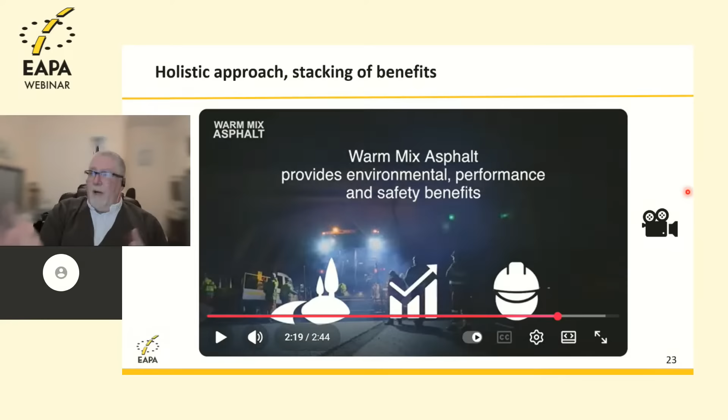And promote all of your benefits, regardless of what your key driver is. That's the one you focus on, that's the one you shout about first, but flag up everything else. So it's a holistic approach, stacking of the benefits. As we said, in 2016, Warm Mix Asphalt provides environmental, performance, and safety benefits. And end with the call to action to make Warm Mix Asphalt use the norm rather than the exception.

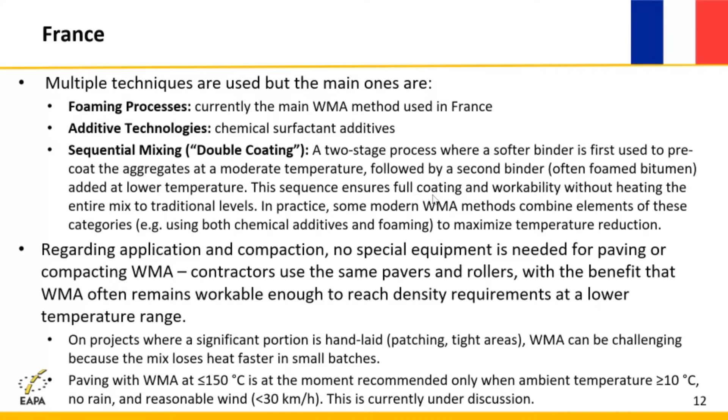Regarding the application, compaction, etc., no special equipment is needed, and contractors use basically the same equipment with the same standards. It is true that on projects where a significant portion is done by hand and in small batches, like patching and tight areas, some problems may happen because the mix heat cools down faster because of the small amount. Also, the recommendation right now of using Warm Mix Asphalt at less than 150 degrees is only recommended when the ambient temperature is more than 10 degrees, no rain, and the wind speed is less than 30 kilometers per hour. Although it is true that all these conditions are currently under discussion because recent developments are allowing actually to pave in worse conditions.

Regarding the logistics, there are no major technological barriers at the moment, reported from France. And in fact, already by 2020, most plants and producers already have at least one Warm Mix Asphalt process installed in the asphalt plant.

Regarding the production, we have seen some increase from the years 2009 to 2015. But then due to the lack of demand and incentives, we have some steady stage where the production, the market share, was around 10 to 12% of the total production. But then in 2021, with this agreement, they experienced a big push for Warm Mix Asphalt, bringing the market share up to values of 24-25%. We have seen last year, however, a small decrease that we will have to continue monitoring, to see if it's just something that happened last year, but the trend will continue going up, because as I showed, the objective for 2030 is higher still. So we'll have to see if actually the trend continues going up, really hard to meet that objective. And it's also true that there are big variations depending on the regions, different inside France.

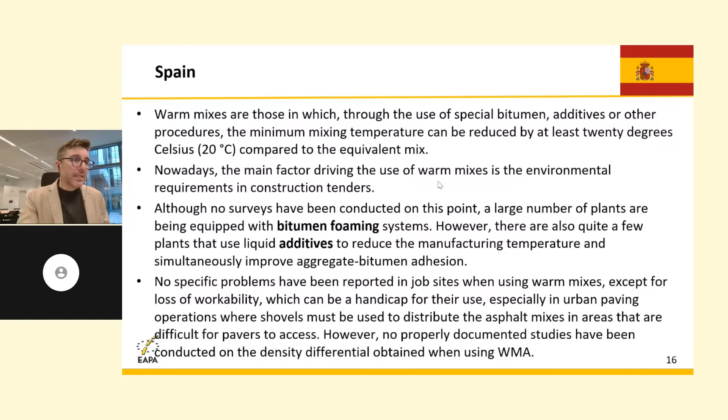No specific problems have been reported in job sites when using warm mixes, except for the loss of workability sometimes, which can be especially relevant when there is a lot of handwork on site. Still, no properly documented studies have been conducted on the density differential, so saying that the density at the end is lower - we don't have evidence for that in Spain at the moment.

Quality control of Warm Mix Asphalt obtained by foaming is a problem, as there is no laboratory equipment at the moment that can simulate manufacturing conditions in the plant. In practice, hot mix formulations are developed and manufactured using foaming technology with samples taken at the plant to verify adequate performance. When we see the production, we don't see a clear trend.

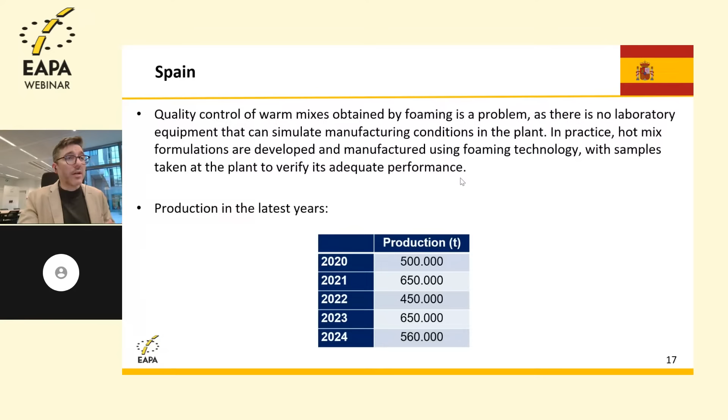It's more like a fluctuation of values of year productions between, let's say, 500,000 tons and 650,000 tons. And the challenge is that so far there's not really pressure from the administration related, for example, to exposure to fumes, like is the case of Germany. And at the same time, there's no really significant economic advantage for the companies to do that. So this is why things are not moving so fast.

But two main driving forces that have been identified by our Spanish colleagues are that if health and safety legislation gets stricter, or for example, we have more regulations on emissions trading systems with penalties for CO2 emissions through taxes on non-renewable fuels, these kinds of things will for sure increase the use of warm mix asphalt.

The next country is Italy. In Italy, since December 2024 we have what is called the minimum environmental criteria for roads, where they have introduced the concept of warm mix asphalt in a very interesting way, I would say.

Basically for urban roads and sections of extra urban roads located less than 1,000 meters from residential areas, the maximum installation temperature is 120 for unmodified bitumen and 140 when we have, for example, rubber or modified bitumen or polymeric compounds. Beyond 1,000 meters from residential areas, we can still use temperatures of 150 for unmodified bitumen and 165 for the other cases.

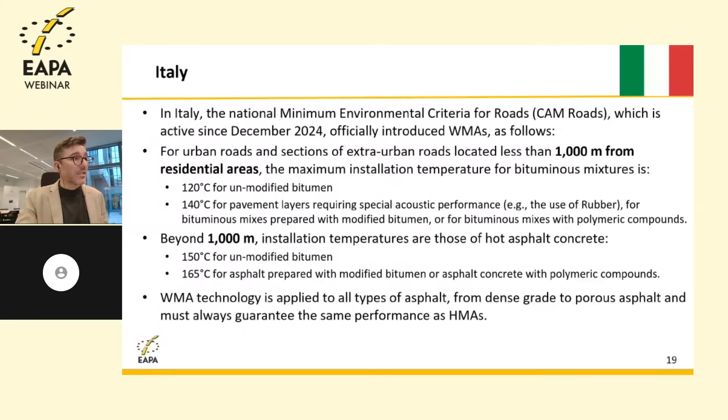Warm mix asphalt, all this applies to every type of mix, from dense grade to porous asphalt, and must always guarantee the same performance as hot mix asphalt. The main drivers in Italy are reducing emissions in urban areas and reducing heat islands, which bring other benefits that are appreciated, such as lower energy consumption and worker safety.

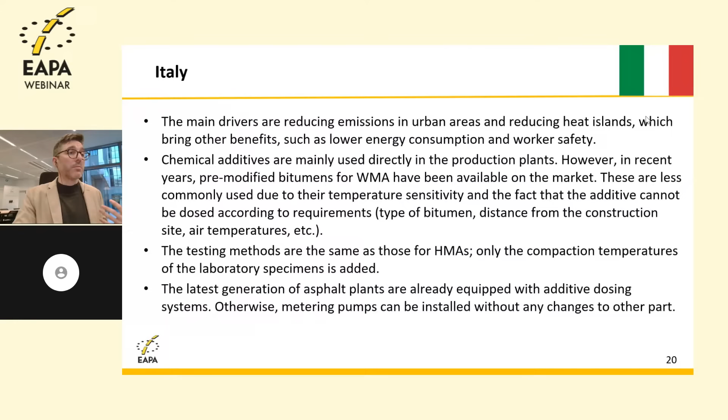Chemical additives are the main technology used at the moment. In recent years pre-modified bitumens that already come with additives have also been used, but it's not really a technology that is growing much because it lacks flexibility to adapt to different cases and situations. The testing methods are the same as those for hot mix asphalt, only the compaction temperature of the laboratory specimens is added. The latest generation of asphalt plants are all equipped with additive dosing systems, and for others, metering pumps can be installed without any changes to other parts.

The main challenge reported is that in Italian documents, solutions that increase service life and recycling are generally preferred. Warm mix asphalt itself is not something we do to extend service life, or it has nothing to do with recycling, and this is why there's not such a strong push at the moment. But the recommendation is that if an organization, public administration, contractor or similar is evaluating the inclusion of warm mix asphalt in its programs and policies, they should consider both the benefits and the risks and critical issues. The potential advantages shall be verified using an LCA and compared with other technologies over the service life of the pavement.

From Ireland, we have received information that warm mix asphalt is gaining rapid acceptance across the country, with widespread capability among producers and growing specification by road authorities. In 2024, approximately 650,000 tons of warm mix asphalt were produced, and currently local authorities and county councils require a minimum of 20-25% of asphalt being warm mix asphalt. The Department of Transport has announced a target of 50% warm mix asphalt use in DOT works by 2026.

Trials carried out with Transport Infrastructure Ireland, often in conjunction with Reclaimed Asphalt Pavement with RAP content, have shown significant reductions in CO2 emissions, and all monitored sites have performed satisfactorily to date. With strong policy momentum and positive field performance, warm mix asphalt is expected to become the default asphalt type for base and binder course material for DOT and TII works in Ireland within the next few years.

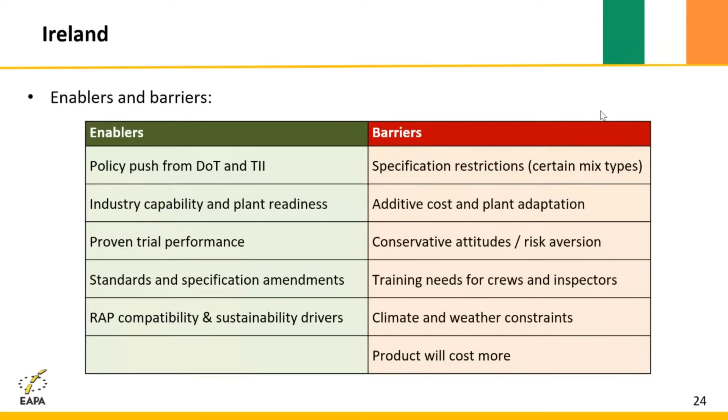However, we also have enablers that can revert the situation: policy push from the DOTs and TII, industry capability and plant readiness, proven trial performance, standard specification amendments, and RAP compatibility and sustainability drivers.

Finally, they have sent some recommendations on what to do and what not to do for quality control. It's important to control production and delivery temperatures precisely, use type testing and factory production control in line with EN standards, verify additive compatibility with binder, aggregates, and RAP, and maintain proper compaction to achieve specified air voids and binder content. Don't allow excessive cooling or hold times without mitigation, for example use of insulated trucks, and don't compromise on quality control or temperature monitoring, ensuring consistency of the product from plant to site.

In Croatia, warm mix asphalt has been included in the regulations recently and is understood as mixes manufactured at least 30 to 40 degrees lower than the equivalent hot mix asphalt, similar to Spain but even more ambitious. Energy consumption savings, CO2 emissions, and fumes exposure are the main drivers for introducing warm mix asphalt. There are still no fixed requirements in tenders or documentation which mandatorily require the use of warm mix asphalt. Bitumen foaming technology is mostly used, around 90% is foaming, but some special projects have used waxes.

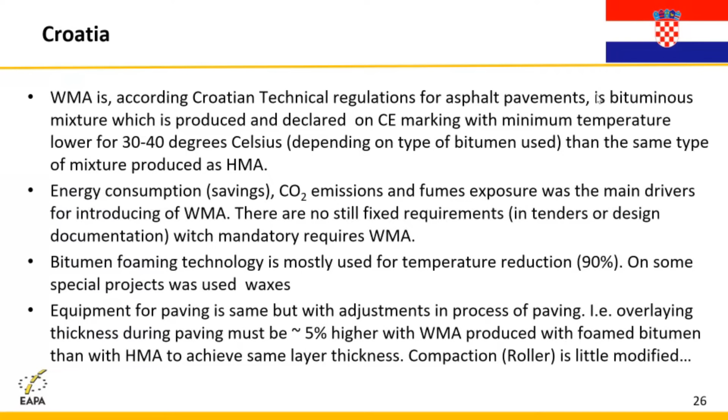Equipment for paving is the same, but with adjustments in the paving process. For example, overlaying thickness during paving must be 5% higher with warm mix asphalt produced with foamed bitumen than with hot mix asphalt to achieve the same layer thickness. Some little modifications are also needed for compaction.

The workability and stability of some types of mixtures is generally better in the mid-range of temperatures, and quality control processes are the same as hot mix asphalt. Health and safety requirements are met even more easily than with hot mix asphalt, so no problem in this regard. At this moment, around 10% of all asphalt produced in Croatia is produced as Warm Mix Asphalt.

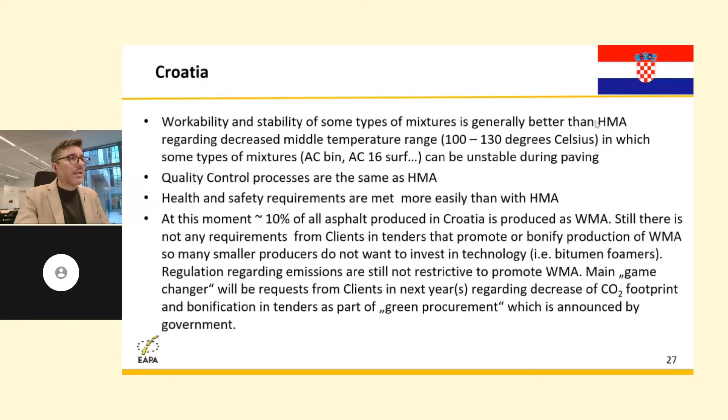Still, there are no requirements from clients in tenders that promote or give bonuses for production of Warm Mix Asphalt, so many smaller producers do not want to invest in this technology.

Regulations regarding emissions are still not restrictive enough to promote Warm Mix Asphalt, but the main game changer will be more requests from clients and administrations in the next years, for example related to the decrease of CO2 footprint and bonifications in tenders as part of green procurement, which was already announced by the government.

Finally, I would like to present the case of Czech Republic, where until 2024, the use of Warm Mix Asphalt was practically marginal. This was mainly because of the absence of demand from both administrations - there was absolutely no bonus or bonification for the use of Warm Mix Asphalt compared to hot mix asphalt.

In fact, there is a requirement from the Ministry of Transport for a certificate of product suitability, which at the moment no additive still has in the market. Also, there are no cost benefits for producers, etc. So this is why things didn't move.

But in 2024, the national authority in Czech Republic became aware of what was going on in other countries like Germany, France, the Netherlands, and they started moving things forward.

So they announced in 2024 four tenders for road rehabilitation works, which were treated as experimental sections to see what is going on there. Two job sites were carried out in 2024, two are being carried out in 2025, and every test section is being done by different companies and different technologies.